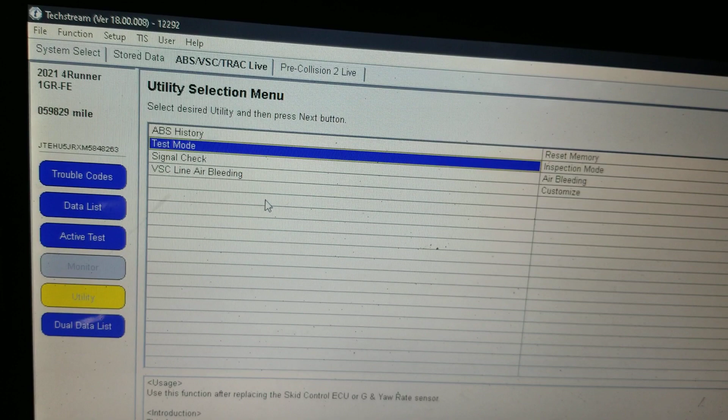All right, finally figured it out. This is version 18.00.008 of Techstream, okay? Notice I'm in ABS VSC TRAC live, okay?

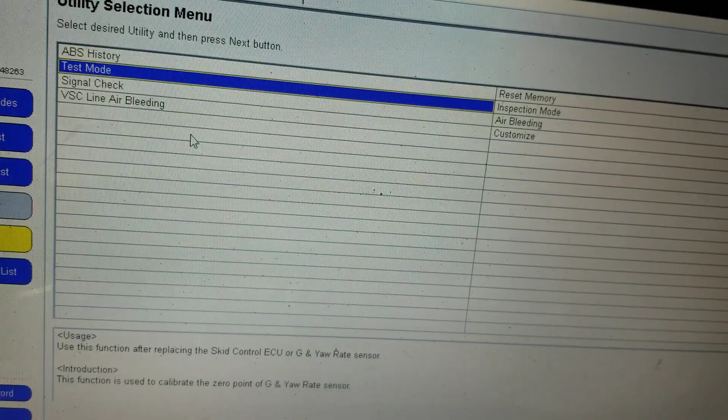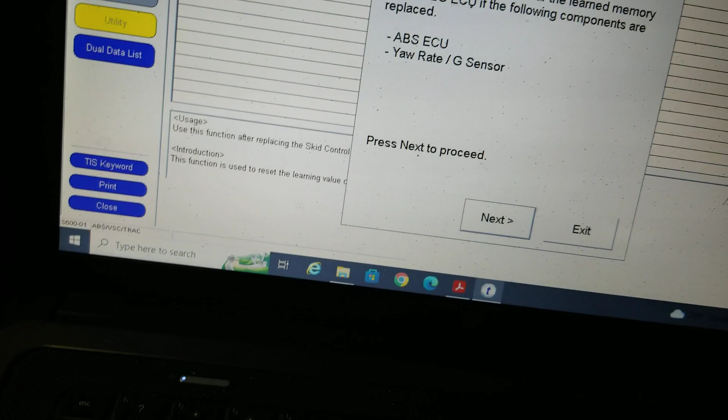Now, what you're going to do, first, if you follow the instructions, it'll say, go over here, reset the memory, okay? Just double click that. Come on. And it'll come up with this question, right? So you push next, then don't drive it yet. The instructions say to drive it, but don't drive it yet. Do you want to exit? Yes, I want to exit. I'm just showing you guys, okay? Don't drive it yet.

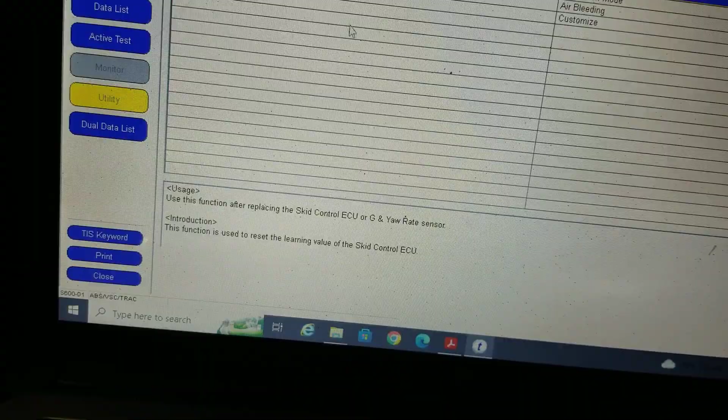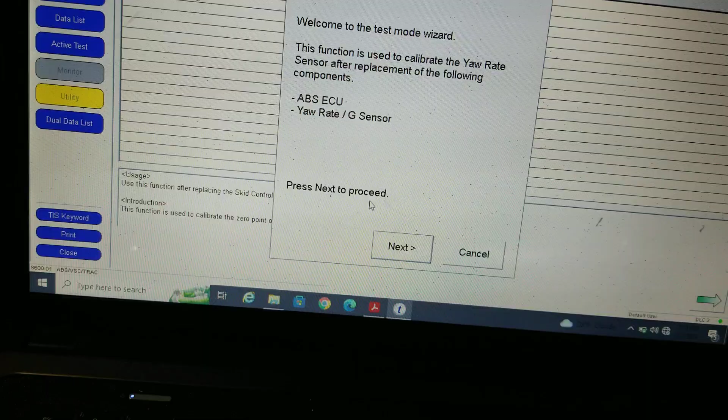Okay, after you reset the memory, then go over here to test mode. Double click that. Sorry. Test mode. Come on. Okay. Now it's going to say all this stuff. Okay, now to enter test mode, this is all you're doing. This is what the wire does. Okay, the wire that's on pin 12 in your DLC connector just puts it into test mode. That's all it does. This is how you do it in Techstream.

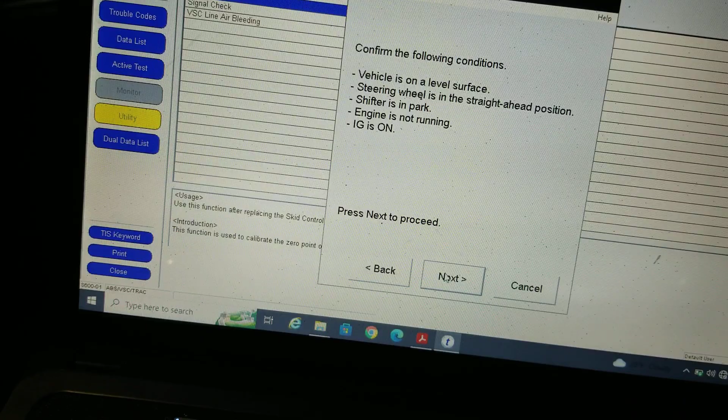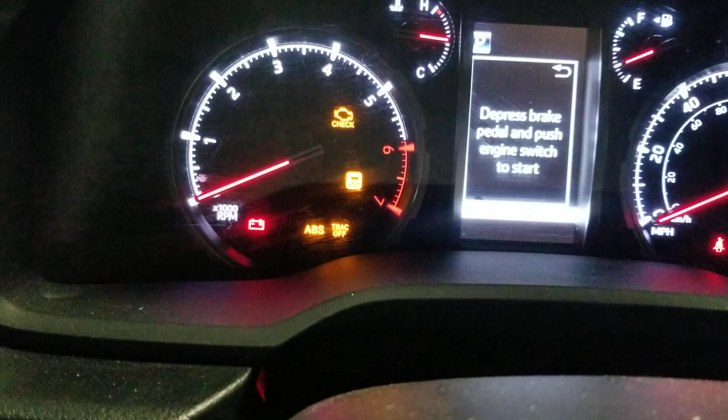So I'm going to click next. Make sure you meet all those conditions. Next. Wait for 5 seconds. Now, see how those lights are blinking? That means I'm in test mode. That's all that means. Now, you can go ahead and do your crawl control if you have it, or downhill assist, right? So you're going to push that button and make sure that light comes on. When that light comes on, just while you're pressing the button, that means it's ready to receive the input, right?

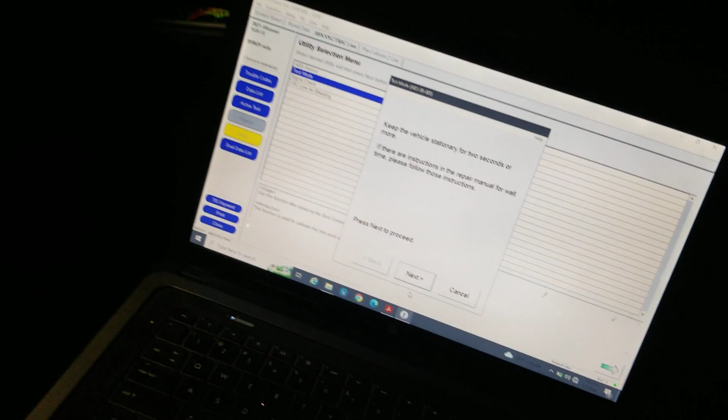So then the instructions say go low, low, medium, medium, medium, high, then back to low. Then you're still in test mode. Oh, flipped over to the manual there. You're still in test mode. See that? Still in test mode. Shut it off. This is what worked for me, like 3 minutes ago. Now start it back up. Let's see, hopefully I don't have any lights after doing it again.

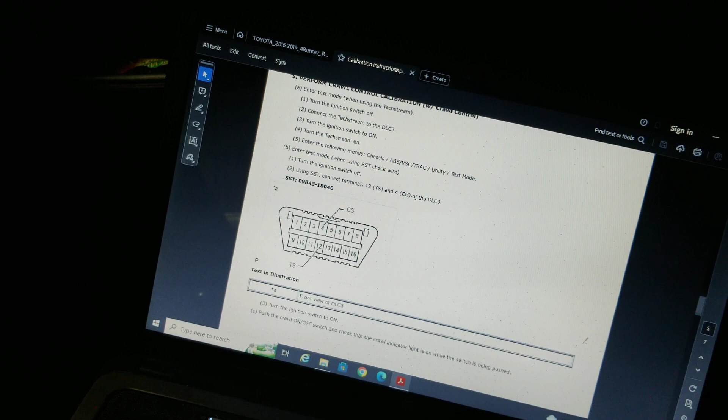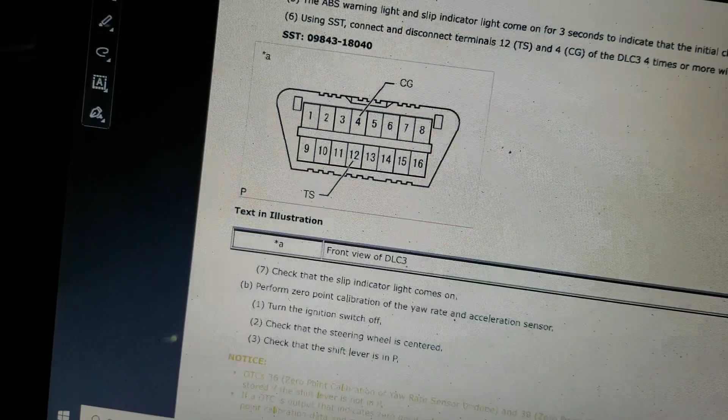Okay, now, okay, we can cancel this. We're done with test mode. Yes, exit test mode. Okay, we don't even need Techstream anymore. But now we got to go finish the other step up here. Under 0-point calibration. Right here. Let's see. Check that it's in park. Okay, look at this note. This is where I got this.

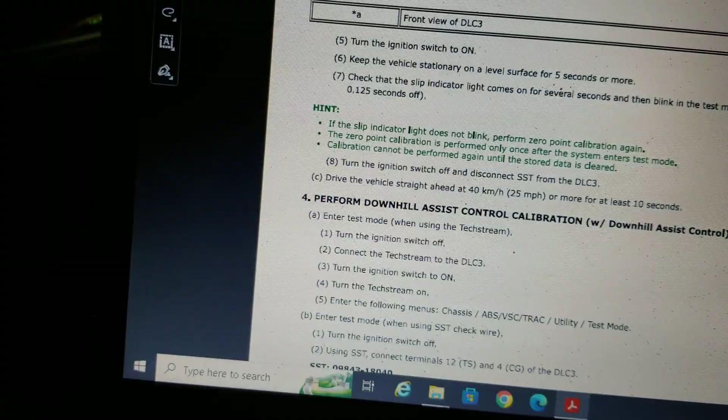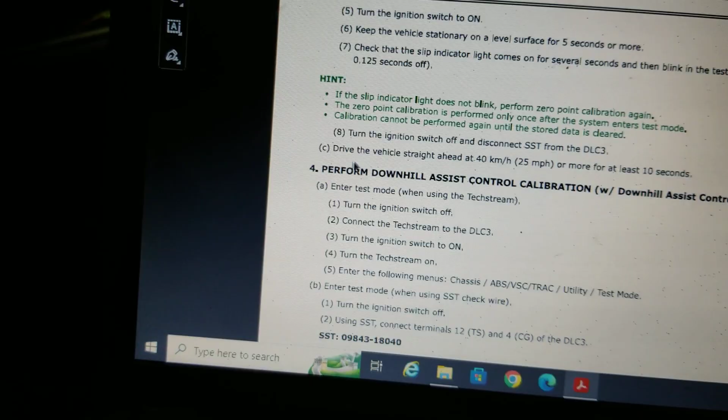Calibration cannot be performed. Okay. So here's the last thing we got to do. Drive vehicle straight ahead at 25 miles an hour or more for at least 10 seconds. We haven't done that yet since we cleared the 0-point data when we reset the memory. That's it. You reset the memory, put it into test mode, verify the lights are blinking. That's how you know you're in test mode. Then do your crawl control or downhill assist, whatever you got. And then go drive it. And you're done.